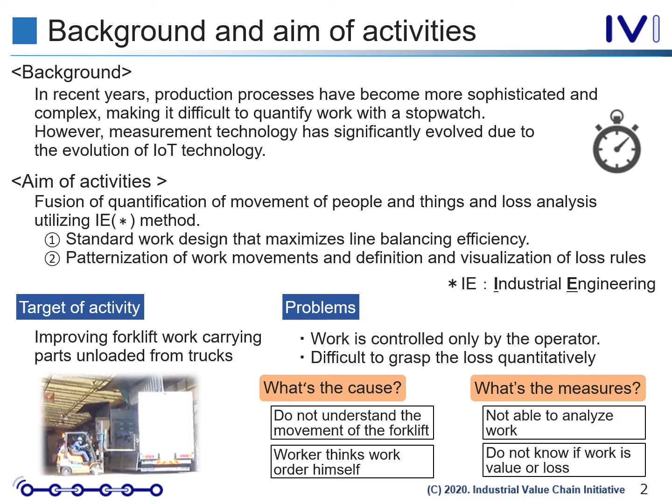Recent advances in IoT technology have made significant advances in measurement technology in loss quantification, which is a specialized area of IE. Therefore, this year, we challenge to visualize the movement of forklifts in logistics workplaces, which are common to every company. In this activity, we thought the important point is that it is inexpensive and easy to install for any workplace that is using forklifts and other logistics equipment, regardless of industry.

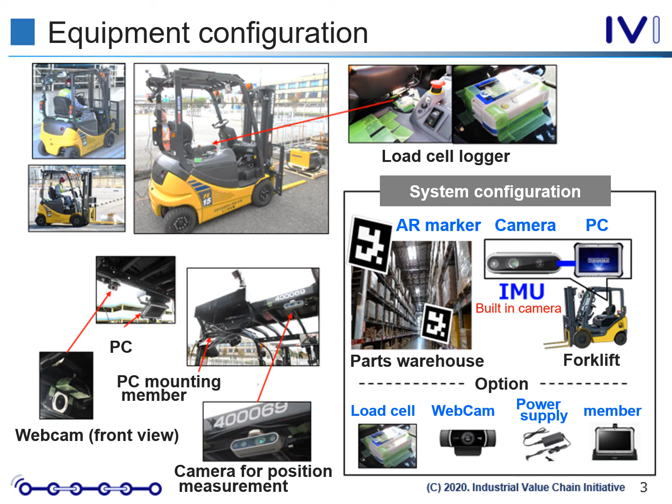Therefore, we aim to make it possible to use it in various workplaces without making a large investment by having a device configuration to collect information by each forklift and carrying the device around. We started the experiments with the cooperation of Panasonic Corporation with regard to electronic devices such as cameras and PC.

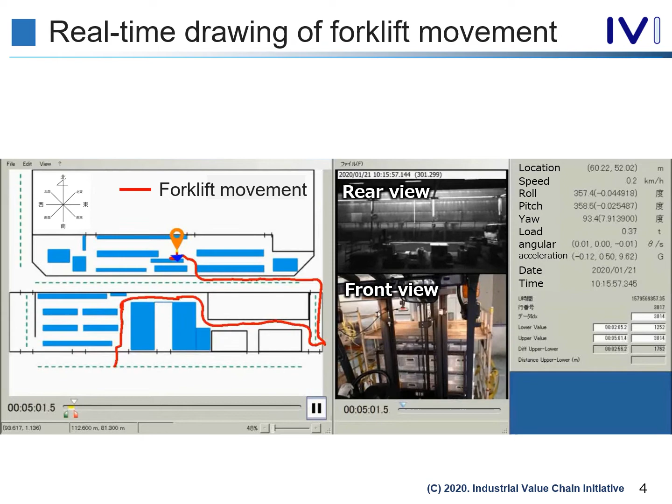Please see the left diagram in the slide. The software draws a flow line on the layout with a red line. The center is the screen of rear view and front view taken by the camera. And, on the right is the dashboard, which displays data from sensors in 0.1 second increments.

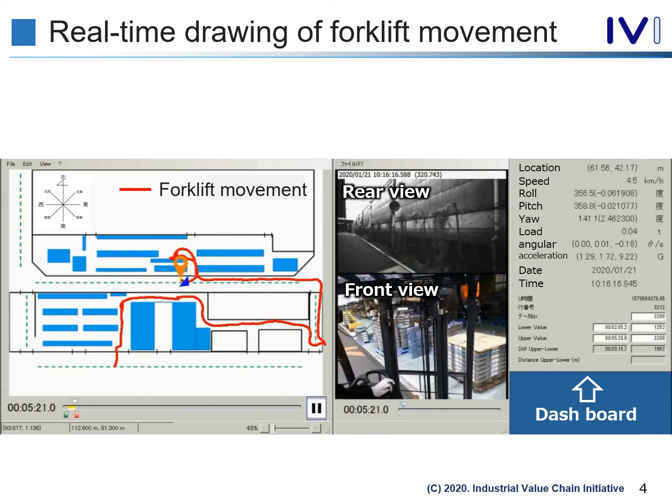The first row shows the X and Y coordinates of the forklift. If the forklift moves to the east, you will see the X coordinate increasing. If the forklift moves to the north, you will see the Y coordinate increasing. The second row is speed information. The sixth row is the information on the load applied to the forklift.

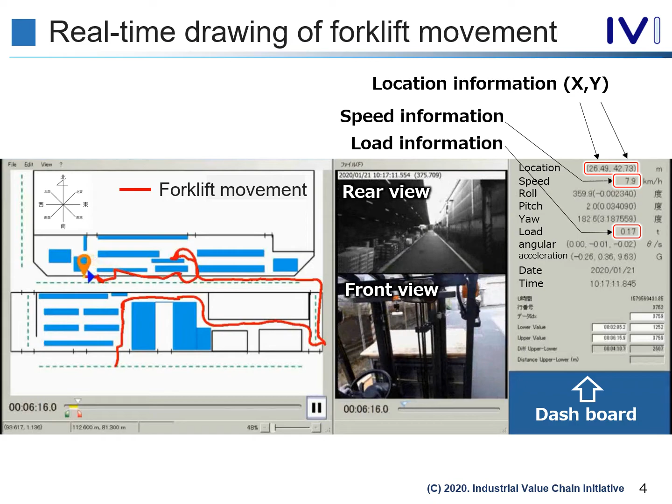It became possible to draw the real-time plotting of a moving forklift, and we could capture the movement of the forklift. The activity members, who were unable to enter the operation area due to safety issues, were able to accurately grasp the actual movement of the forklift.

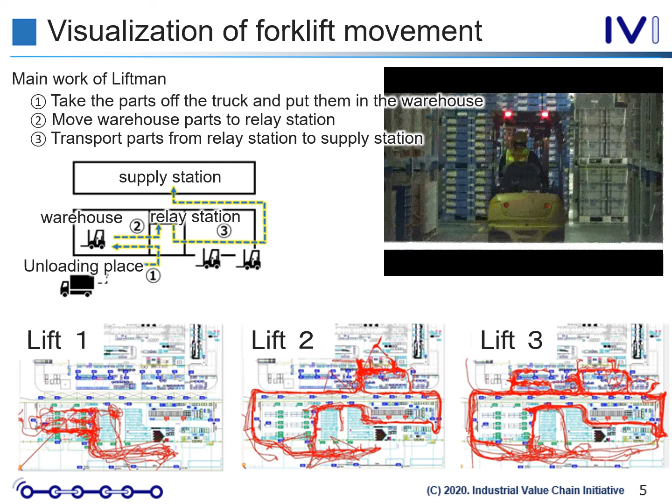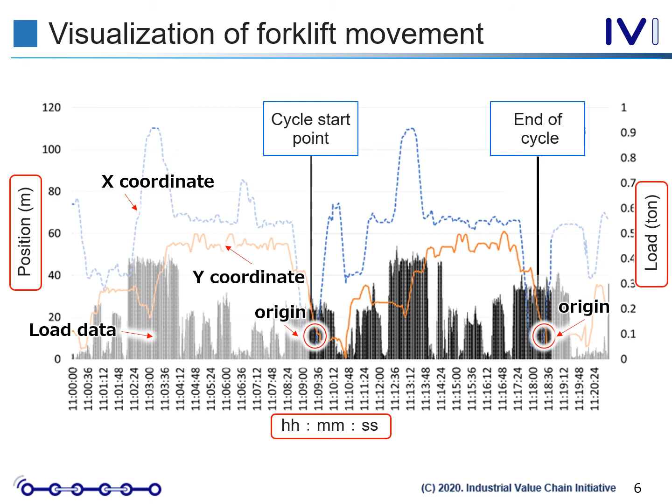We can identify the working location from the coordinates regarding the actual movement of the forklift. Also, changes in load data have made it possible to grasp changes in parts transportation and empty running.

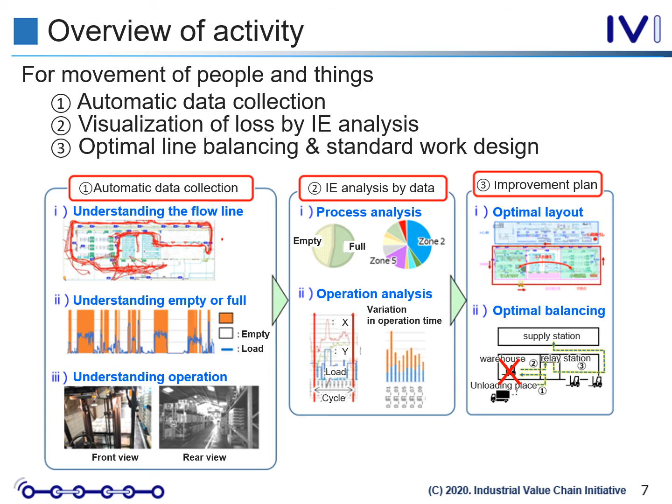This slide shows the result of drawing the flow line in real time that I just explained, arranged by forklift.

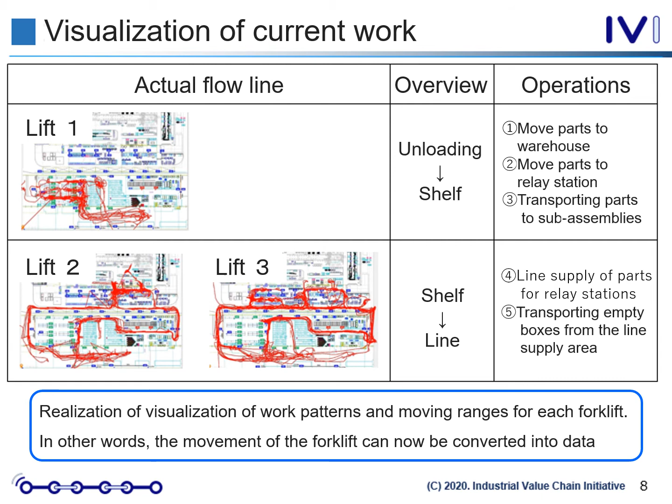By visualizing the movement of a day with the flow lines in this way, you can see clearly that there are two types of flow line patterns: forklift 1, and forklifts 2 and 3. The main work of forklift 1 is to put the parts unloaded from the truck into the parts shelf. The main work of forklifts 2 and 3 is to carry the parts taken out from the parts shelf or truck to the line supply area.

From now on, I will explain how we analyzed and developed the improvement plan using the visualized data. There are roughly two kinds of patterns: forklift 1, and forklifts 2 and 3. Regarding forklift 1, when we analyze which work zone the forklift is working in, there seem to be patterns for each zone, so we decided to do a detailed work analysis. Forklifts 2 and 3 are moving cyclically all day long, and we analyzed the working time focusing on the variation in working time and each cycle time.

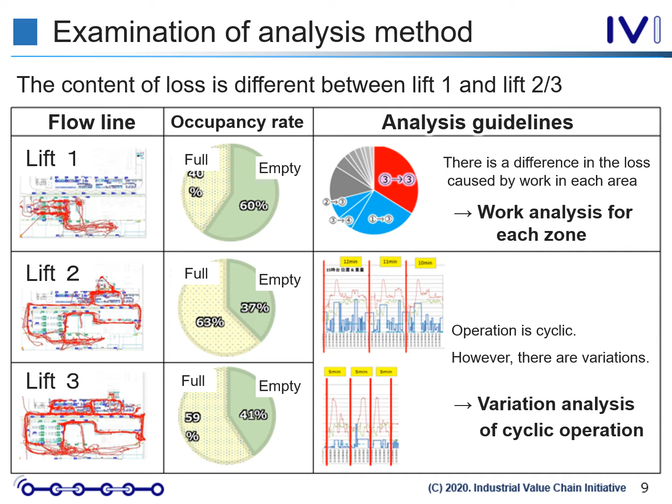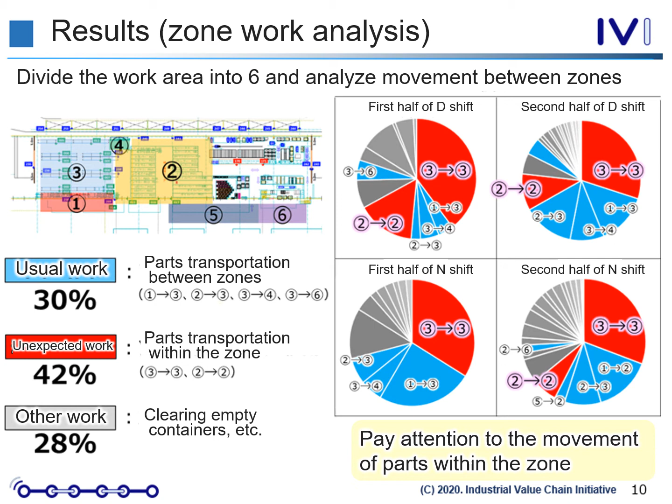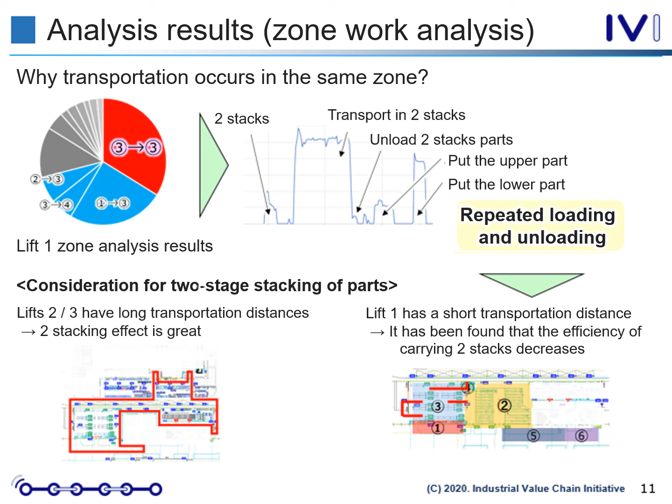We found that forklift 1 carried parts in double stacking by analyzing how much load is applied. Since forklift 1 has a short distance from zone 2 to zone 3, the ratio of transportation time is small. It spent much time on double stacking work and then put pallets on the parts shelf one by one. We confirmed that double stacking is more effective for forklifts 2 and 3 because the transportation distance is longer. On the other hand, it was found that the cause of the loss in forklift 1 was double stacking during short distance transportation. The design of the standard operation is not completed yet.

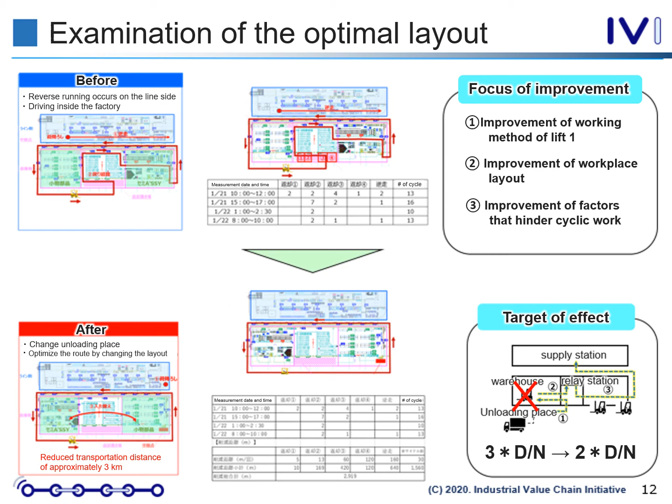However, during the analysis of the flow line, there was a proposal from one of the members: if we change the location of the parts shelf where forklift 1 is mainly working, the location of the relay station for the parts transfer from forklift 1 to forklift 2 could be changed, and the flow line shown below could be created to greatly reduce the work time. Therefore, we would like to reflect the results of the loss analysis in standard operation design as an improvement viewpoint, and we would like to turn the current operation of 3 people into an improvement that can be done by 2 people.

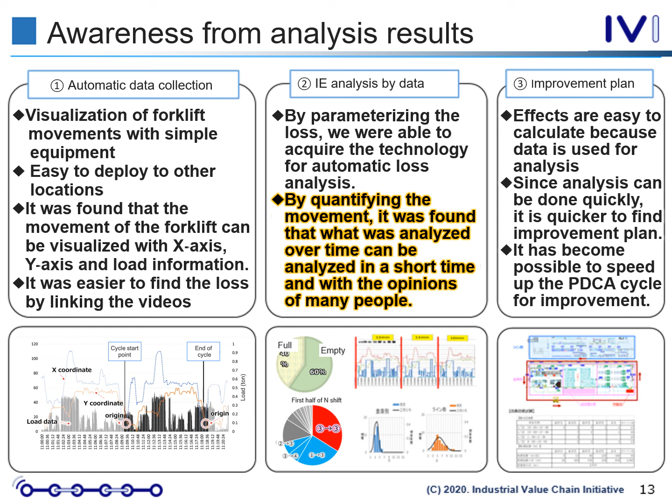Finally, I would like to talk about the findings from this analysis and future challenges. We have noticed many things. In particular, as you can see in the middle column, by quantifying the movement of people and objects, it became clear that what had been investigated and analyzed over a long period of time could be analyzed in a short time with the wisdom of many people. I am confident that this will enable us to implement the PDCA cycle for improvement faster.